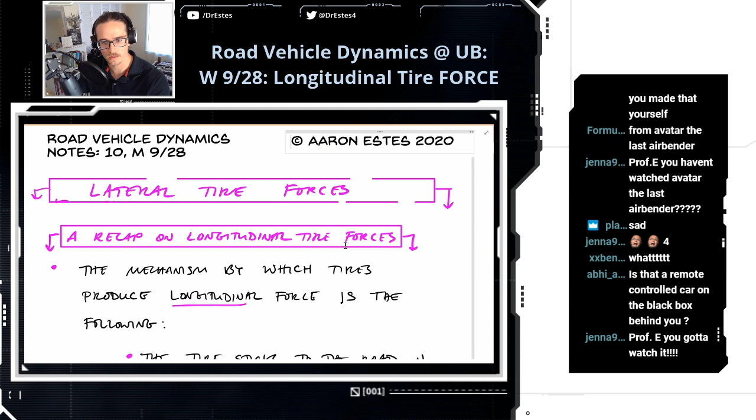Oh wait, we gotta change this title. You know, I enjoy animated shows though. I think I told you I love Full Metal Alchemist Brotherhood.

DD Josh, do you also play the Chinese bamboo flute? No, but somebody mentioned something earlier, like the vertical flute, we call it chow. I don't know if I said that right, but I'd be interested in that. And they make these flutes in all different sizes, this is like a mid-size. I want to get a more bassy flute. I haven't watched too many animes, but Full Metal Alchemist Brotherhood I loved, that's probably my favorite. What else did I watch?

Okay, I've seen Cowboy Bebop, loved that. My Hero Academia. Oh yeah, maybe Samurai Champloo, hands down. Isn't that made by the same people who did Cowboy Bebop? Okay, maybe I need to watch that too.

Oh, I did see some of Attack on Titan. I didn't finish that, I think there's like 2 seasons of that. Oh, you know what I did see? I watched One Punch Man and I loved it. Oh my goodness, I loved One Punch Man. It's laugh out loud funny because it's a parody of all these different animes, and it's just really funny.

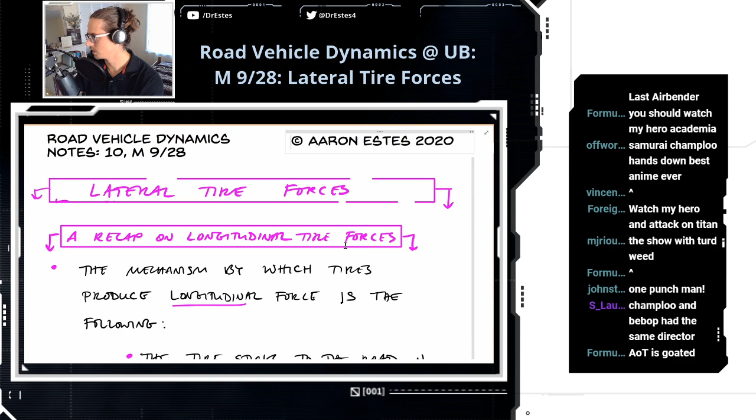Attack on Titan is fire. Yeah, I need to get back into it. I didn't get far enough in for it to really take off.

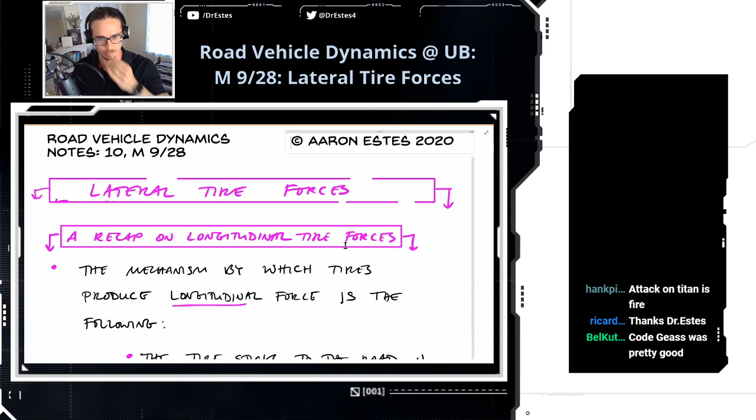All right, today, yeah, it's gonna be pretty sick, he's really cool. So if you're interested in what a job looks like in the automotive industry in some way, he can tell you all about it. He's spoken to the class before, he's really great. So if you want career advice or you're curious about what it's like working with racing teams to design tires, my friend works with him. Well, I know there's a student who took this class last fall, he got a job at Sumitomo. So it's not unheard of for people coming out of the UB program to get into this stuff.

Ooh yeah, Hank, take some vids. All right, everybody, let's talk lateral tire forces, but first I want to review longitudinal tire forces.

Isn't John Robinson also a serial killer from the 2000s? Different John Robinson, or maybe it's the same, he turned his life around. It's all good, we don't talk about that.

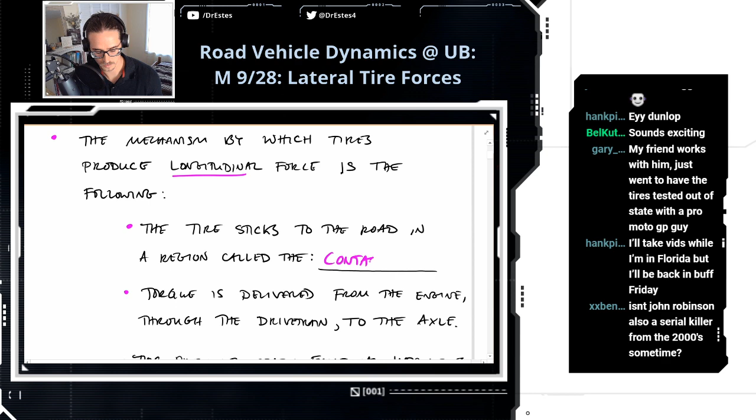Okay, the mechanism by which tires produce longitudinal force - I'm talking about going down a straight - is the following. The tires stick to the road in a region called the contact patch.

Gary, you work there right now? Oh wow, you were just there 15 minutes? Okay. Gary works at Sumitomo, I didn't know that. That's cool.

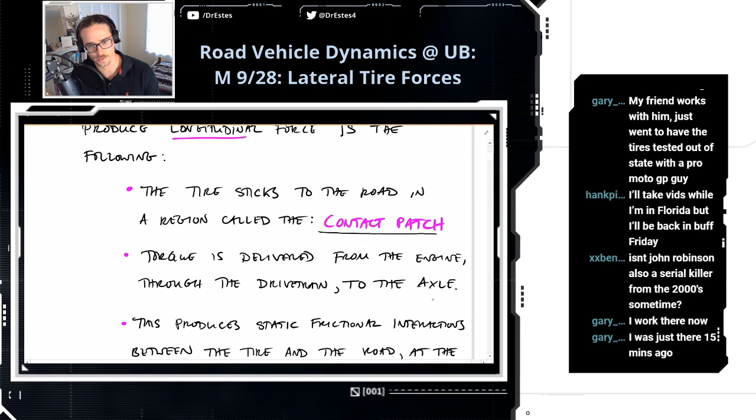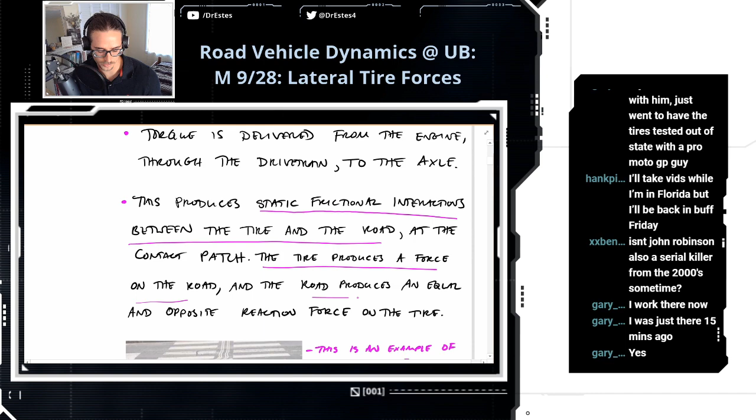Okay, so torque is delivered from the engine and travels through the drivetrain all the way to the axle. Let's say this is a rear-wheel drive car. Once this torque gets to the axle, it produces static frictional interactions between the tire and the road, because the axle's rotating the tire, and the tire is in contact with the road, so there's friction at the contact patch. The tire produces a force on the road, and the road produces an equal and opposite reaction force on the tire. This is a cool figure I want to show you.

So you can see this is like a crosswalk, and it's got some paint on there, and you see it's all deformed here. This is an example of how the force from a tire on the road produces stress, and it deforms the road surface.

So I have a question for you, everybody. Which direction, right or left, are cars traveling on this road to deform the road in this way over time? Are they heading to the right, or are they heading to the left? You're guessing right. Come on, Hank, you got this one. Wait, I think Hank's driving to Florida. Don't drive him off the road.

Cars only go right. Ben, they can go different ways. Let me put on my Sherlock Holmes cap. Yeah, great show, by the way. Well, and films and books.

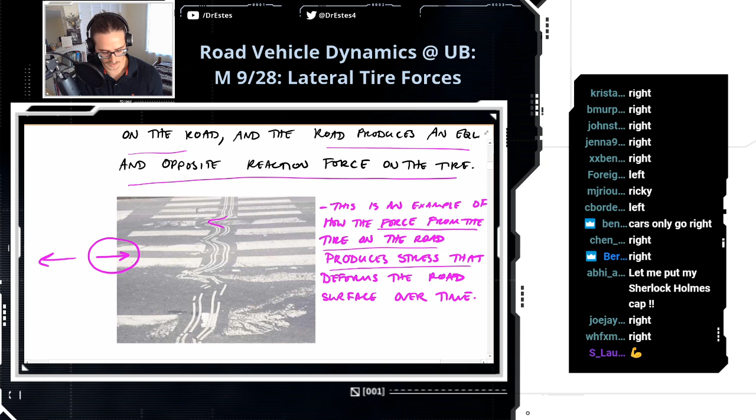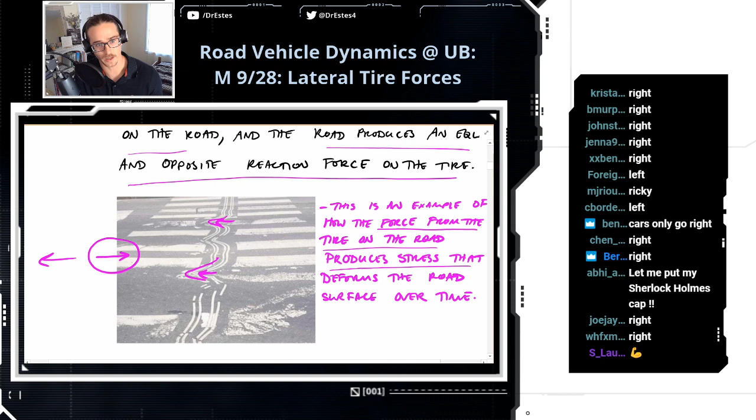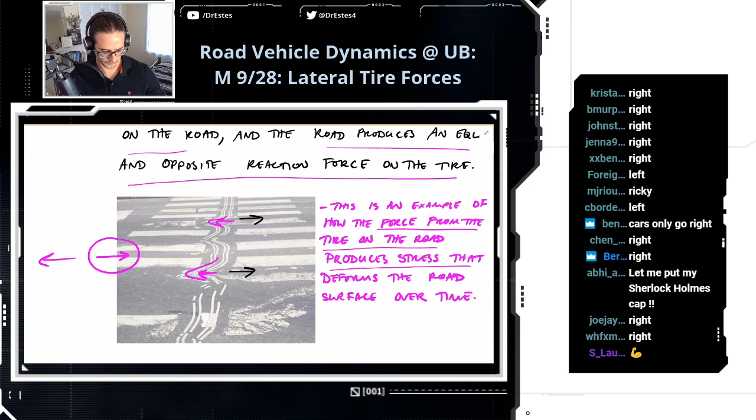Okay, you people who said cars are going this way, you're correct. Because think about this: the road pushes on the car via frictional force, but the tire pushes on the road in return. So where you see these patterns like this is where tires are going through all the time, and they're pushing on the road this way, and the road is in turn pushing on the tire this way and advancing it forward. But just like the tire rubber deforms and then corrects itself like a spring, the road deforms as well over time. I thought this was pretty cool - it's just a demonstration of that equal and opposite force.

So, okay, we're talking about longitudinal force. The combination of the torque at the axle and the reactionary torque from the road surface is going to deform the tire rubber in an elastic way. It's not permanent, so it wants to go back to its original shape.

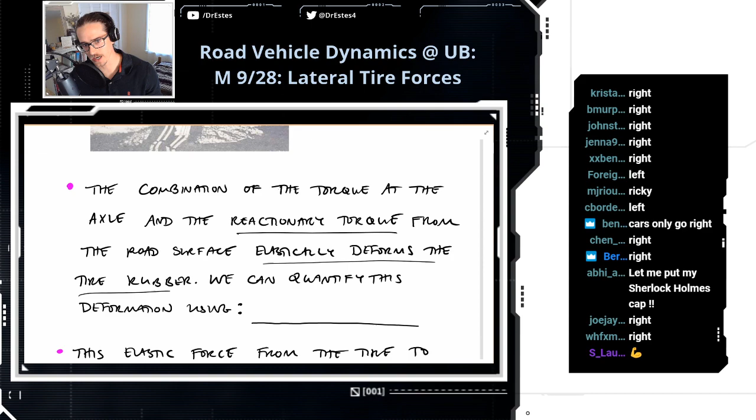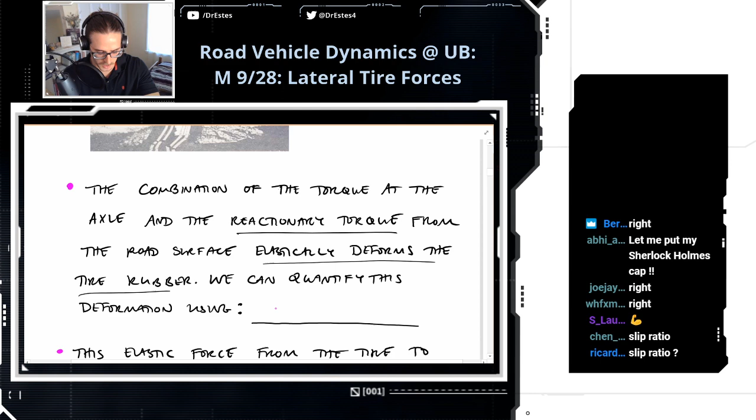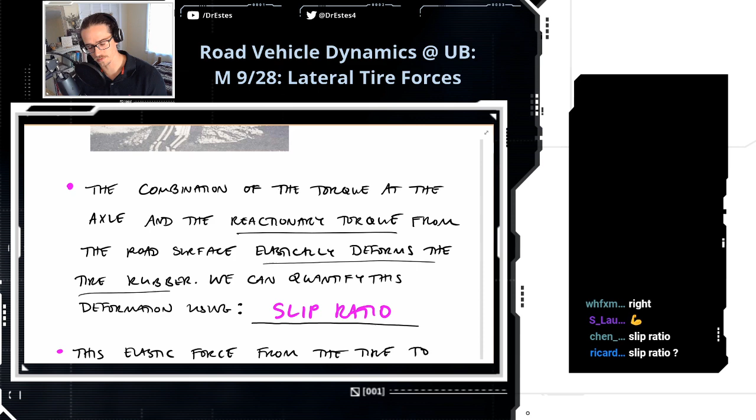We quantify this deformation using what? The chat - I'm asking you, how do we quantify this brush-like deformation in a tire for longitudinal force? Boom, Chen's got it, Ricardo's got it. It's a little bit of an indirect way of measuring the deformation because it's like a ratio of angular velocities. But because the actual angular velocity of the wheel doesn't match what we call the free rolling angular velocity, that means there's some deformation in the tire there. So that's one way to quantify it.

So the elastic force from the tire to the axle pulls the car forward. This slip ratio variable is kappa, by the way. And I don't know if you remember from last time, but force increases as this deformation increases. So as kappa goes up, the longitudinal force the tire produces goes up. Okay, very good.

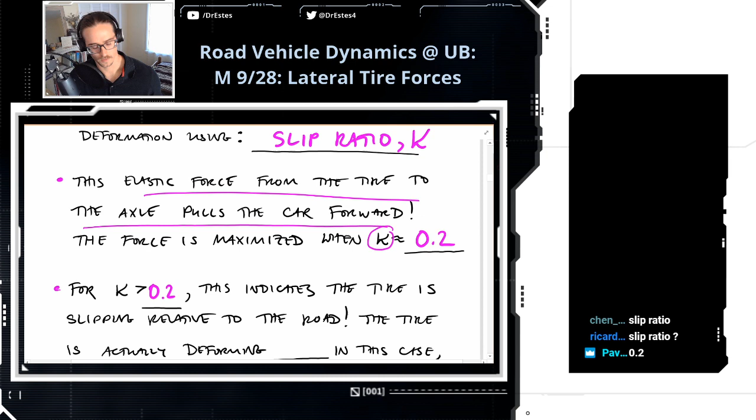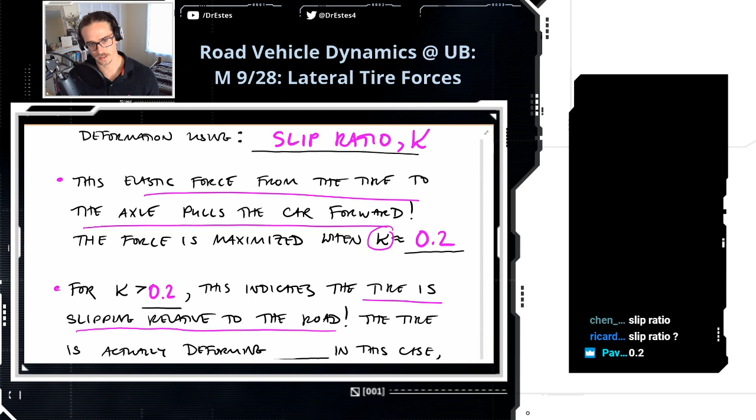Once the slip ratio is around 0.2, the force is maximized. But if the slip ratio becomes larger than 0.2, this means that the tire is starting to slip relative to the road. So if you've put in a little too much gas at a stoplight, you hear your tire spin out a little bit.

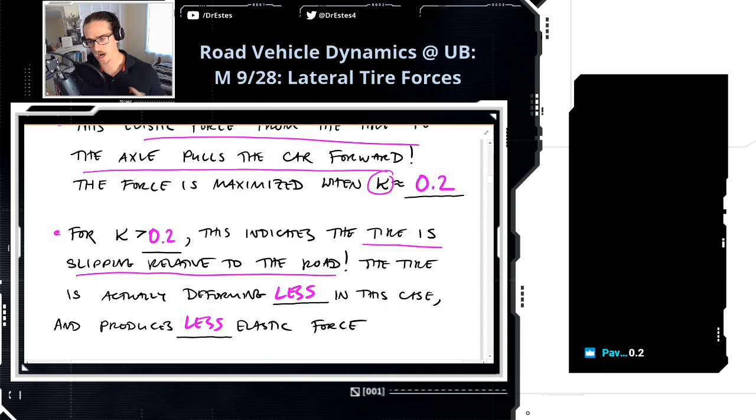When this happens, the tire is actually deforming less because it's not sticking to the road anymore. The fact that it sticks to the road allows the torque from the engine to press the tire into that road, and it deforms it, and that deformation produces force on the car. But when it's sliding, it's not able to deform, and it produces less elastic force. So when you spin your tires out trying to race, you're getting less force.

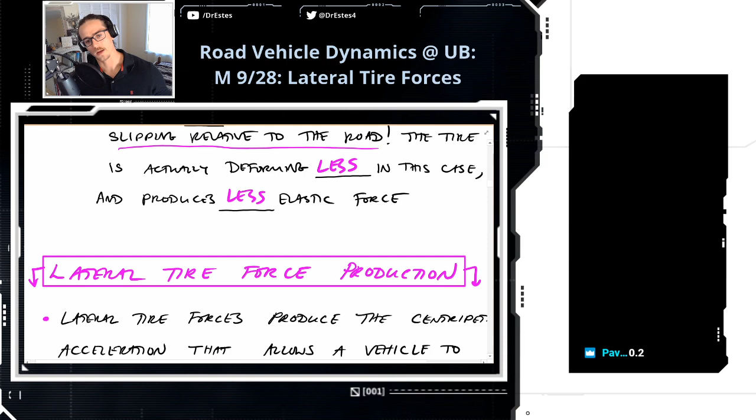So that's kind of the story of longitudinal force. I just wanted to run back through. Lateral force, this is like the side force. It's produced in a similar way.

Lateral tire forces produce the centripetal acceleration that allows a vehicle to corner. When you're cornering, turning left or right, your tires are holding you in that corner. If it's an icy road, maybe you skid out a little bit, and you've noticed when your tires lose traction, you can no longer stay in the corner.

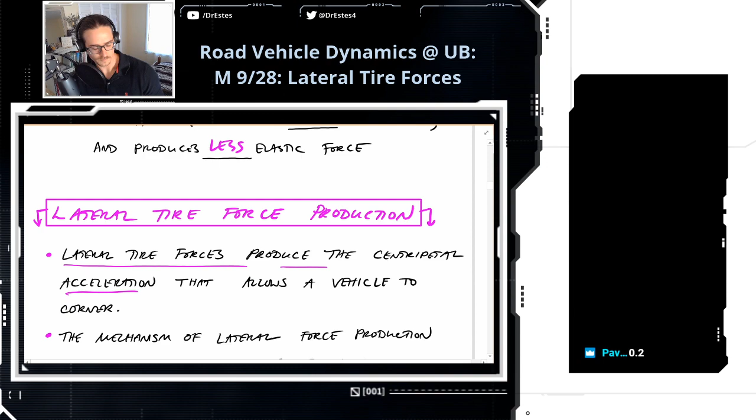This mechanism of lateral force production is similar to the process for longitudinal force production, in that it's the elastic deformation of the tire relative to the contact patch that produces force on the car. When you're turning the steering wheel, your tire is stuck to the road at the contact patch, and you actually deform the tire relative to that contact patch, stretching it like a spring. That's what's going to produce force.

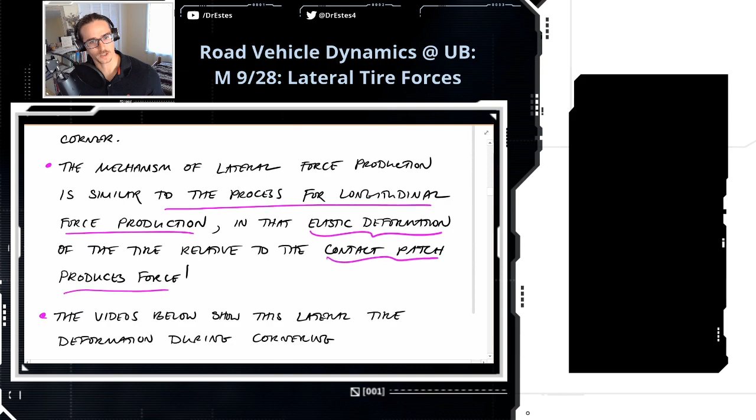Now I want to show you some videos right here. Here we have a camera underneath the car, and these cars are cornering and whatnot, so you get to see how the tire deforms relative to the contact patch. Let's see if I can pull this up.

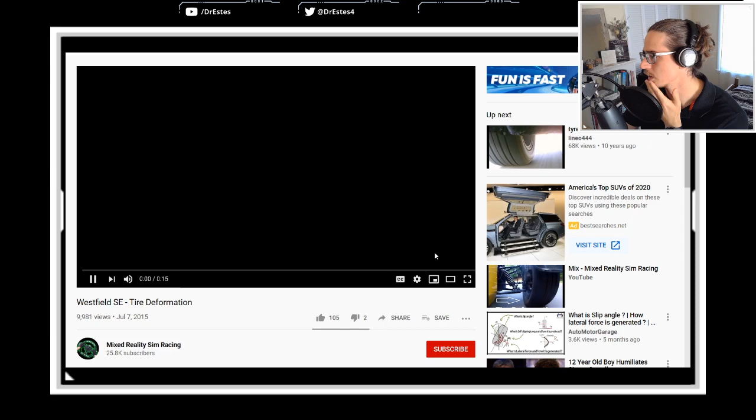So this is the right front tire, and what I want you to do is watch in here, and look at how the tire's deforming relative to that wheel right there. You got the contact patch down here. Try to look at which direction the car is cornering, and look at the deformation pattern as well. So we're cornering to the left, and look, it looks like the tire bubbles out to the left when we corner left.

Because it's on the left side of the tire, it's easier for us to see this deformation while it corners left. Your tire's always deforming. That's producing the force.

Okay, let's watch another one. It may also be happening because of the normal reaction force from the road on the tire. Well, yeah, that'll deform it vertically too, right? We know when we put weight on a tire, it squishes the tire down a little bit. That's why the contact patch sort of flattens out.

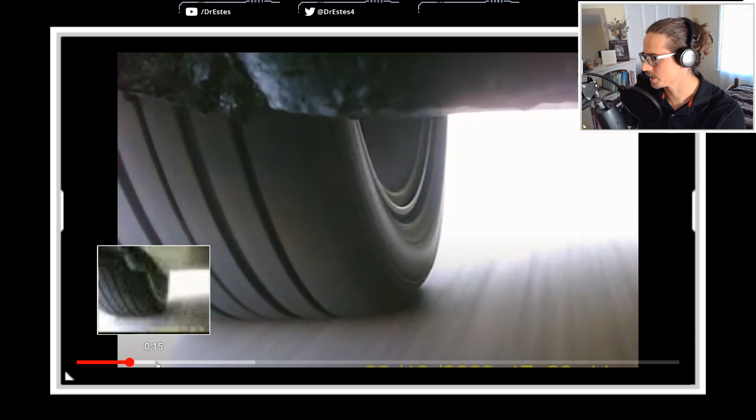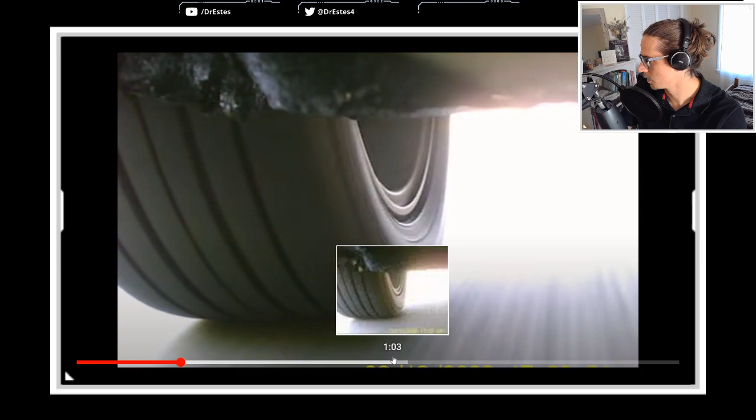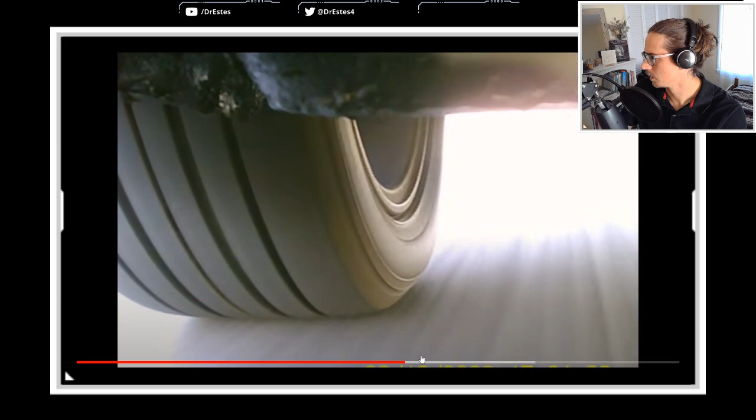Okay, we got another one. This one we can't really see the road so much, so it's harder to... let's try to forward somewhere in the video where this gets a little more extreme. Oh yeah, look at that deformation. It's gonna do it again. It looks like it's cornering to the right.

Okay, so I think you get the idea. Trying to close this thing. Okay.

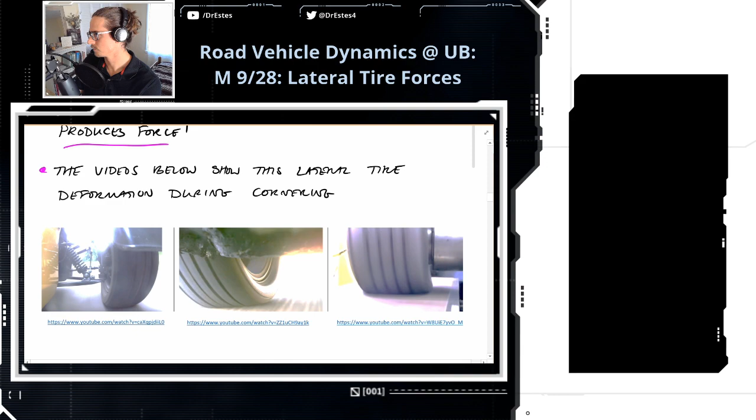All right, so let's break this down a little bit. If only I knew we were doing lateral tire stuff today, I could have tried to get some videos of my tires from last weekend's autocross. Get some of those videos.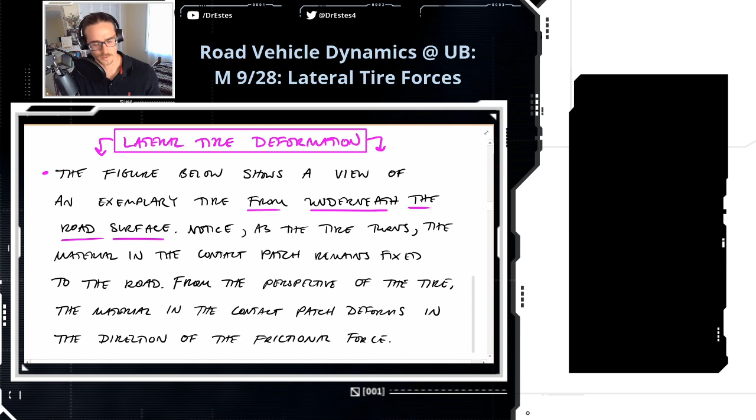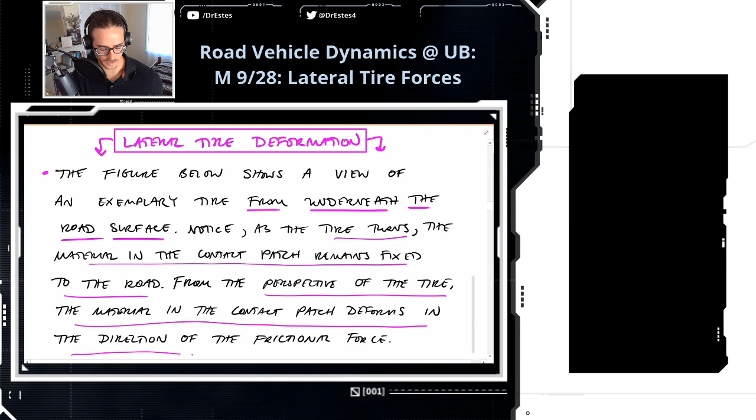All right, so now we're going to look at this in more detail. We're going to look at a view of a tire from underneath the road surface, if you can believe that. We're going to notice as the tire turns, the material in the contact patch remains fixed to the road. And from the perspective of the tire, the material in the contact patch deforms in the direction of the frictional force. So let's break this down.

Okay, so this isn't a real tire. This is some study they did in the 70s. They had this setup where we're looking at a tire from underneath, and it must have like a plexiglass thing with the camera down here. The tire is rolling here to the left, this is our direction of travel. And this kind of light region is the contact patch, where this soft tire for the experiment is pressed into the plexiglass.

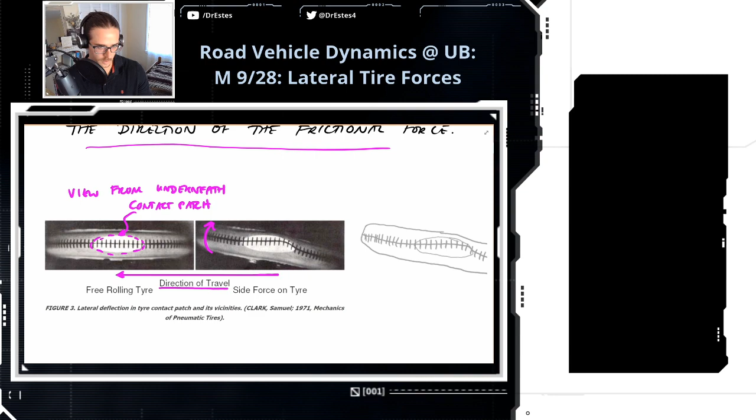And then what we do is we turn the tire to the right. Or wait, if I'm looking from underneath, that's a left. Doesn't matter, we turn the tire. The deformation occurs towards the direction of the frictional force. Yes, well, yes.

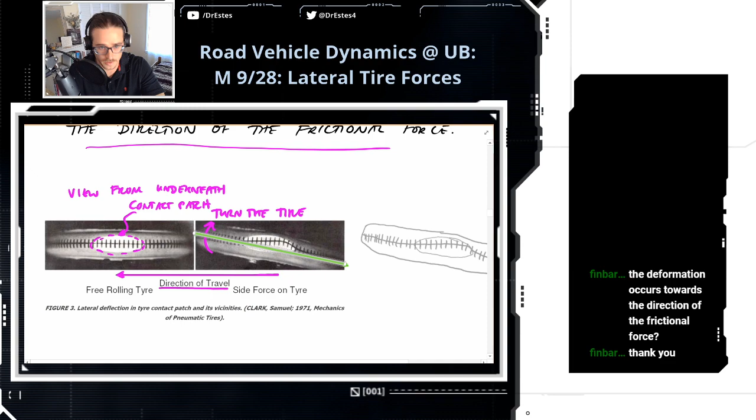Well, let's break it down. So what I'm going to define here is the longitudinal wheel plane. This'll help you see. So if I take the center line of the tire at one end of the tire and connect it to the other end, this creates what we call the longitudinal tire plane.

So we turned the tire plane when we steer that wheel. Look at this though. Remember, the direction of travel is always just straight this way. So maybe I'll draw this again. This is the velocity vector of the tire. It's still heading that way, just straight to the left.

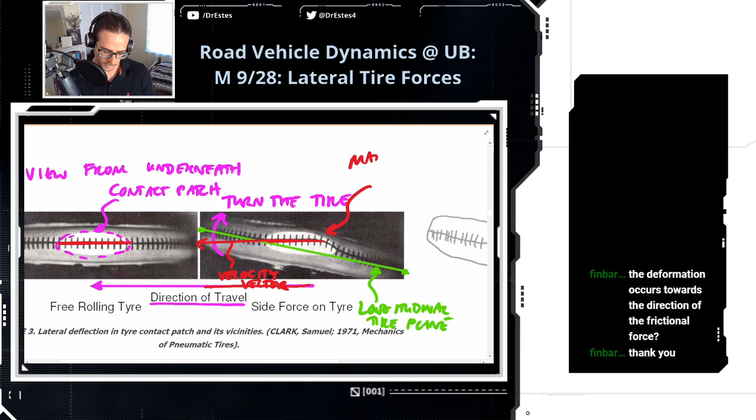And this fiber in the contact patch, it hasn't changed since turning the tire. So let's say that material in the contact patch is aligned with the direction of travel.

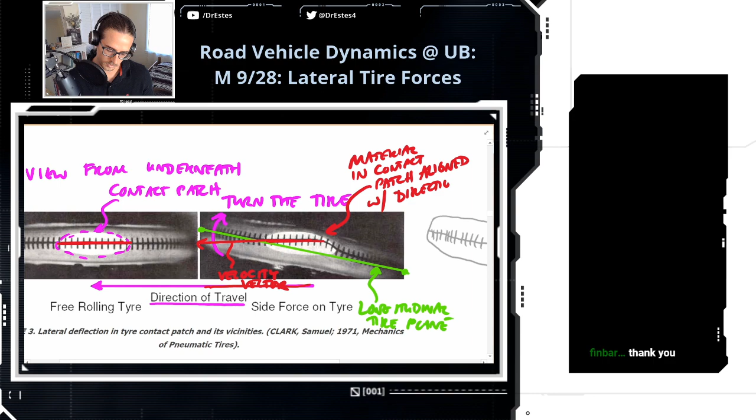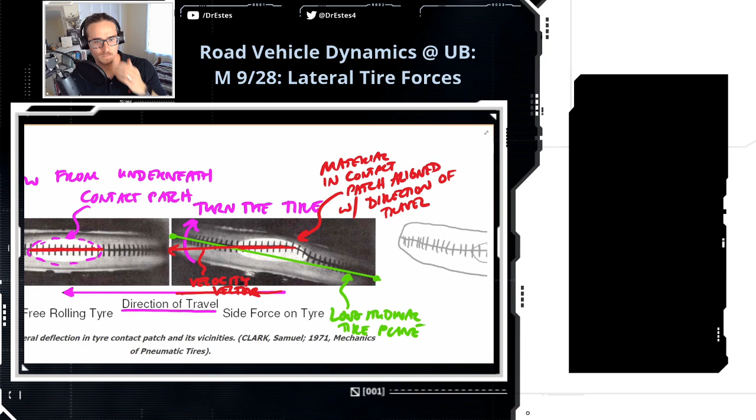And it's still stuck to the road. I'm going to try to break it down a little bit more over here, so I think it'll be easier to see.

So I have the longitudinal wheel plane, and then in the contact patch, relative to this wheel plane, this is the deformation that I'm talking about. It's like from the perspective of the tire, looking down at the contact patch, it's going to be like, hey, my center line in the contact patch is deflected. And that's kind of like in those videos we saw, you saw this kind of bubble on the side of the tire.

And the tire is deforming and bubbling out in the direction that you're cornering. Let's draw this velocity vector again. So when you're cornering, there's always going to be some misalignment between where the tire is pointed, the longitudinal tire plane, that green line, and the actual direction that it's heading.

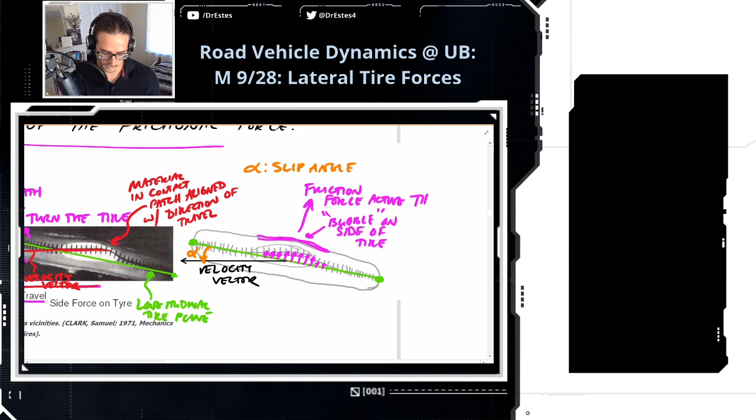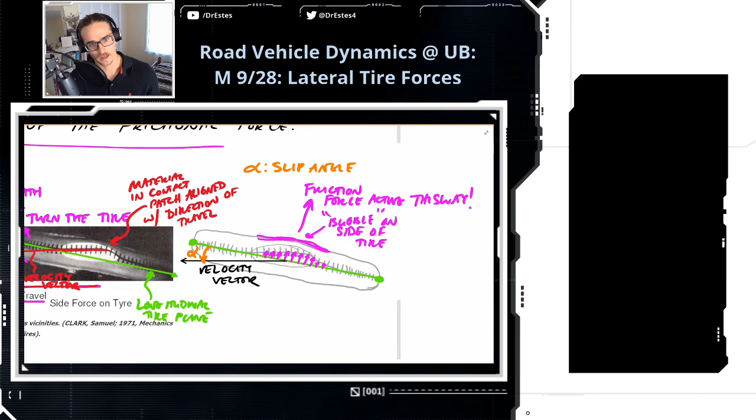Once again, in the contact patch we have this deformation that's bubbling in the direction of cornering, and so the friction force is acting this way on the tire, in that direction where the tire is deforming. And that ultimately means that the lateral force on the car is also acting that way, and it's going to have it corner in that direction.

So maybe we'll just do that. Lateral force, like the side force on the car, is in this direction. So we're cornering that way.

This is one of those things you have to do some thought experiments with. It takes some time to wrestle with, to figure out what's going on with the tires. But I think the way that we did it, watching some videos of the tire from underneath and seeing which way the car is going, that helps reinforce this. Okay, so let's break this down a little bit.

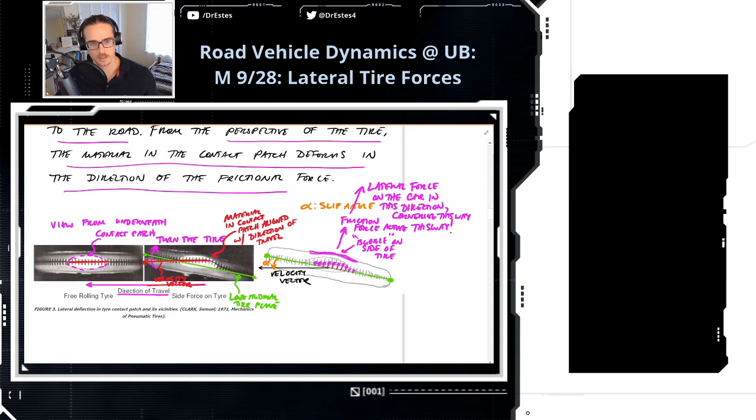So in the contact patch, let's talk about what's going on in there. The tire treads, for one, they're stuck to the road. There's this static friction there. And these tire treads are also aligned with the direction of travel.

In other words, they're aligned with the velocity vector of the tire. Oh, I don't know what I did with this tire here. Okay.

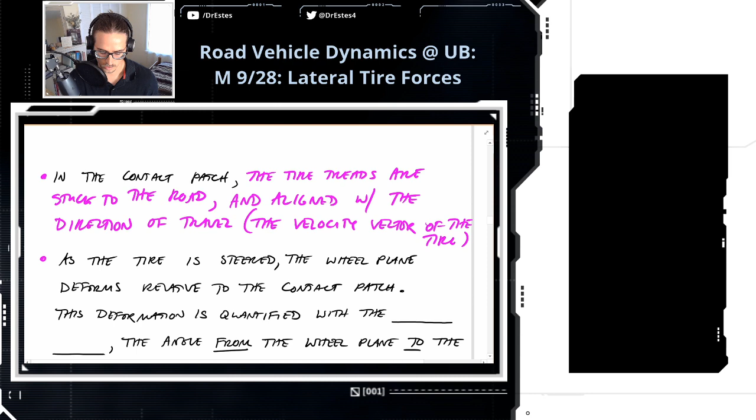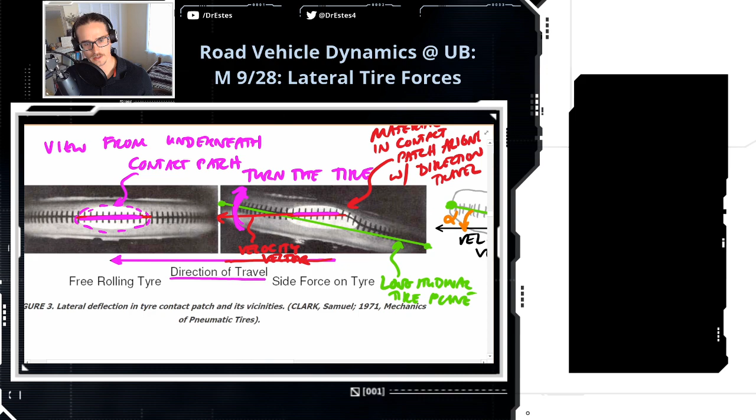So as you steer the tire, the wheel plane is deforming relative to this contact patch. So here we've got the contact patch, it's all aligned with the direction of travel. And then I rotate the tire, and that deforms the tire relative to that contact patch. That contact patch remains stuck to the road.

So the wheel plane deforms relative to the contact patch, and this deformation is quantified with the, not the slip ratio, but the slip angle, and we call it alpha. And this is the angle from the wheel plane to the velocity vector.

And if you want to know, is this a positive or negative slip angle? It is defined positive counterclockwise about the z-axis of the tire. And below we're going to get into what is the z-axis. But according to SAE, the Society of Automotive Engineers convention, the z-axis for a tire is pointing down into the ground.

Okay, so you're stretching this tire laterally, and the tire, because it's like a spring, it wants to regain its original shape. So in my mind, this is the way I think of it: the tire pulls the car toward the contact patch. Like in those videos, it looked like the contact patch was bubbling towards the direction that you're cornering. Well, really, the contact patch is stuck to the road, and it's the car that is kind of veering toward the contact patch.

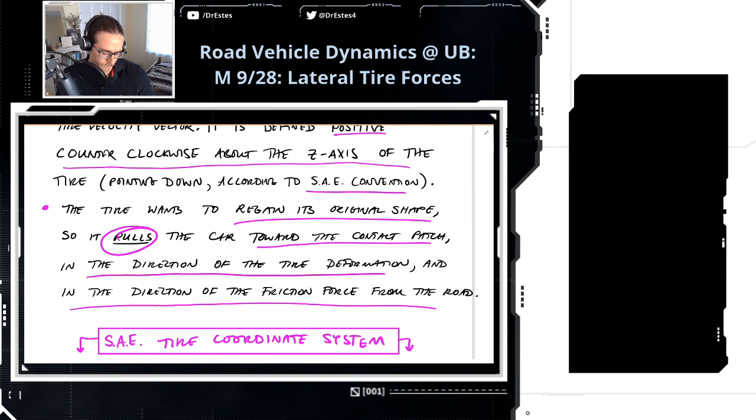So drive safe, everybody, as we're going into the fall here. Oh, I don't even want to think about winter. Don't get me started on that.

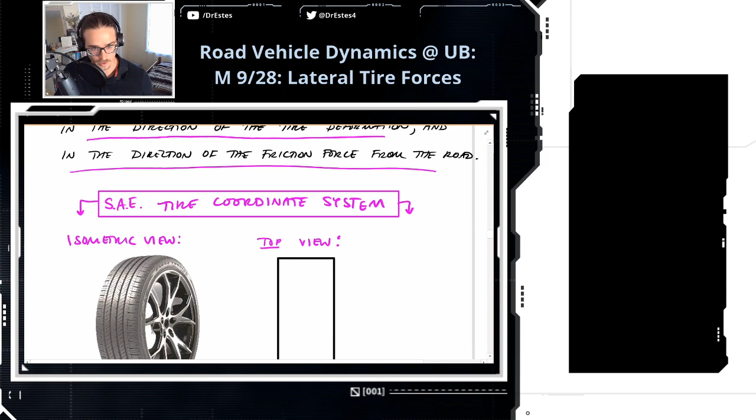All right, let's talk about the SAE tire coordinate system.

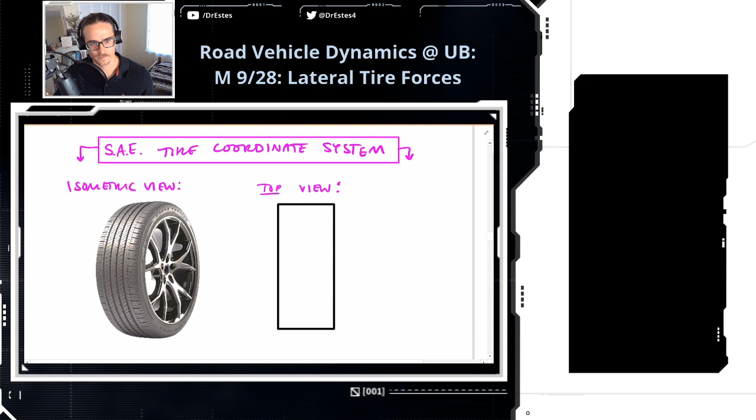Speed up around turns. No, MJ, that's not what I said.

Driving in winter makes me cry. Yeah, I know, it makes a lot of us cry.

The origin of the coordinate system is at the very bottom of the tire, at the contact patch. It's not at the center of the tire, like up here at the wheel hub or something. It's at the contact patch. And the Z direction is defined positive, down.

So the origin of the coordinate system is at the center of the tire contact patch. To get more detailed, it's at the center of the tire contact patch when the car is stationary, because as the car corners, the contact patch deforms, and the origin is not going to change as this contact patch deforms. We always imagine it's at the center of the contact patch when the car was just sitting still on the pavement. All right, so that's the Z direction. The X direction is next.

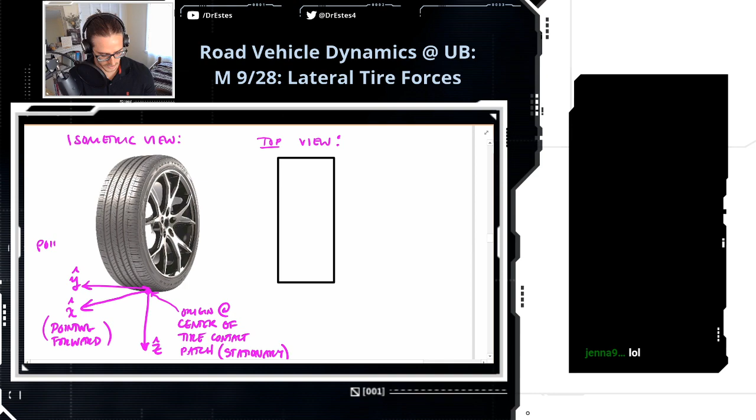Right along the wheel plane. You'll get to see that better in the top view. And then here we got our third axis, the Y direction. This is interesting, it's defined as always pointing to the driver's right-hand side.

Gary says, of course, it would be cool to drift. Okay, of course Gary's bringing up drift. It would be cool to look at the drift car alignments because they are aligned to have the largest contact patch at full steering lock.

Yeah, that'll be interesting because I want to talk about side slip. Winter is great because easy front-wheel drive drifting. You guys and your drifting, it is fun.

Okay, so the Y direction is pointing to the driver's right. So you're sitting in the driver's seat, point your right hand out the window. That's the Y-axis for a tire as well.

So let's look at this from the top view. The origin is right at the center of the tire contact patch when the car is stationary. X is pointing forward along the wheel plane. Oh, front wheel drive, my bad. You're right.

Okay, and then if this is going forward, then that means the driver's right-hand side is going out that way, if we're looking at the tire from the top. And then the Z is going down, so we're going to draw this vector going straight down.

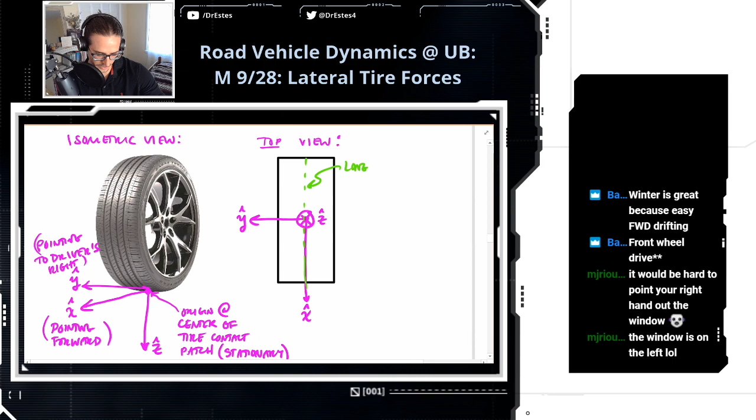The window is on the left. Okay, good point. Use like a golf club or something as an extension of your right arm. Be careful of the passenger. Longitudinal wheel plane, okay, you're right. You have this freakishly long arm that just extends out. That's funny.

Okay, so this is the SAE tire convention. This is just the introduction, we're going to keep working with this, and you'll get used to it. It'll become natural to you.

All right, we're going to talk about something cool: the pneumatic trail and the self-aligning moment.

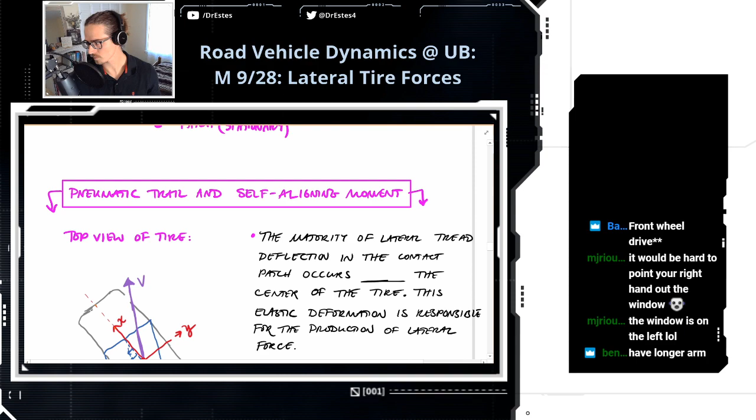So let's look at this top view of a tire. Let's break this down. Here I have the velocity vector of the tire in purple, and notice it's not aligned with the longitudinal wheel plane.

So the wheel plane is aligned with X. Is this the top view? Yes, it is. We're looking at this from the top, Benny.

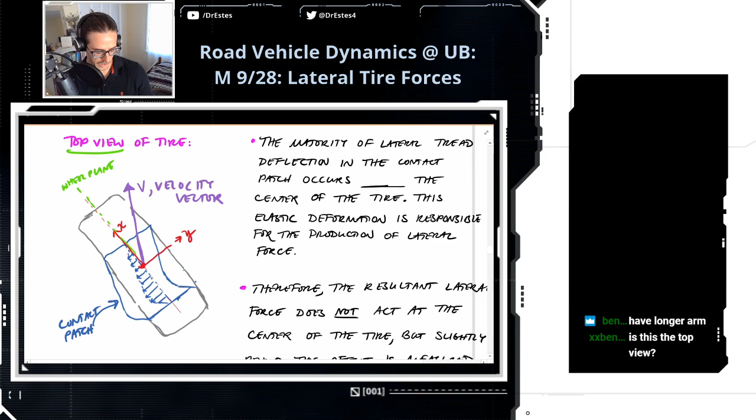Now here in blue, this is the contact patch. So I'm looking at this down from the top, and you're seeing from your top view, like the bottom of the tire is bubbling out this direction.

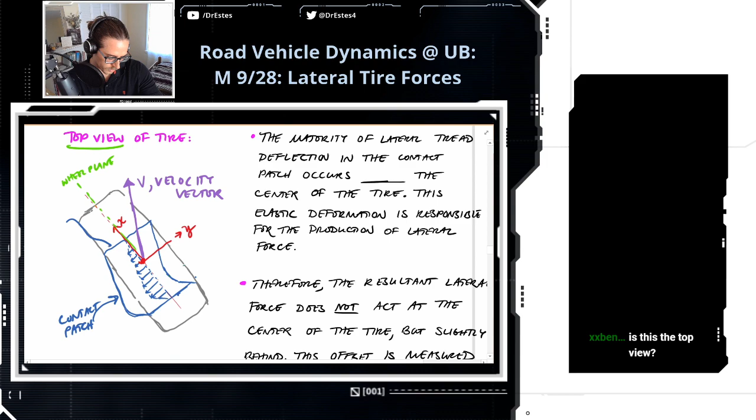So which way is this tire cornering? This is the front of the contact patch. Back here, rear of contact patch. This is turning right.

Wait. Yeah, I think we're turning left. We're turning left, because even though the velocity vector is to the right of the wheel plane, I see why this might be confusing. The velocity vector is to the right of the wheel plane right now, but I'm turning the tire to the left.

And remember, the contact patch is stuck to the road, and so I've turned the wheel plane this way to deform it relative to that contact patch. It's trippy to think about, but always start from the contact patch. It is stuck to the road, and when we turn the steering wheel, we deform the tire relative to that contact patch. So in the contact patch, the center line is deformed according to this kind of pattern.

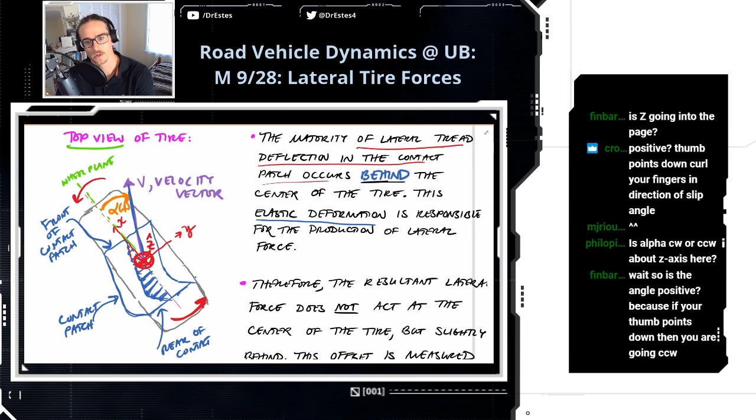Is alpha clockwise or counterclockwise about the z-axis here? This is counterclockwise about the positive z-axis. Is the angle positive? Yeah, the angle's positive, because if you point your thumb down into the page and curl your fingers counterclockwise, it's positive.

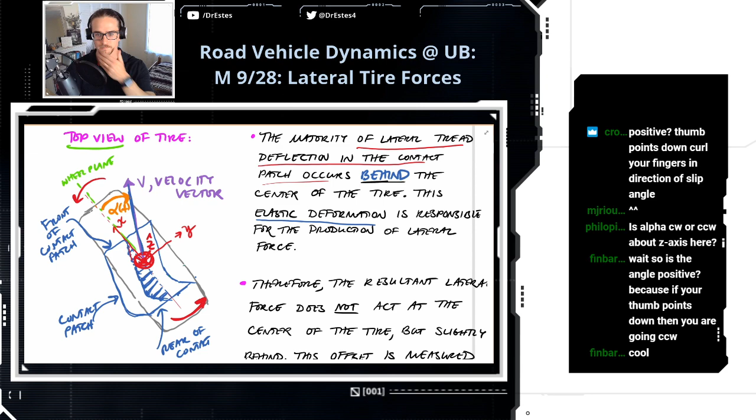Okay, so this deformation produces lateral force. The resultant lateral force from this deformation does not act at the center of the tire because most of the deformation is behind. So let's try to draw a representative lateral force here.

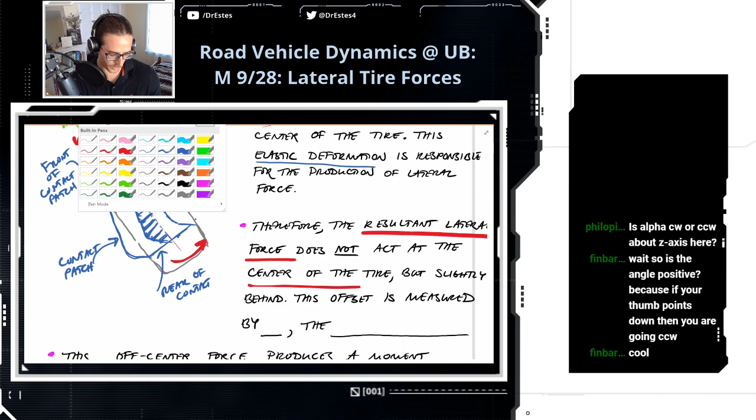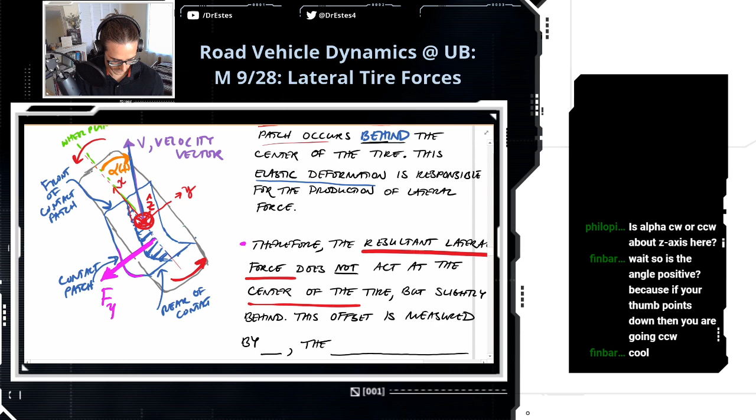So we know the friction force is acting in the direction of this deformation here. You're going to be cornering in the direction of this bubble that's on the bottom of the tire. So the lateral force is going this way. I'll call this F, we'll call this Fy. And I'm drawing it behind the center of the tire because the deformation is mostly behind the center of the tire.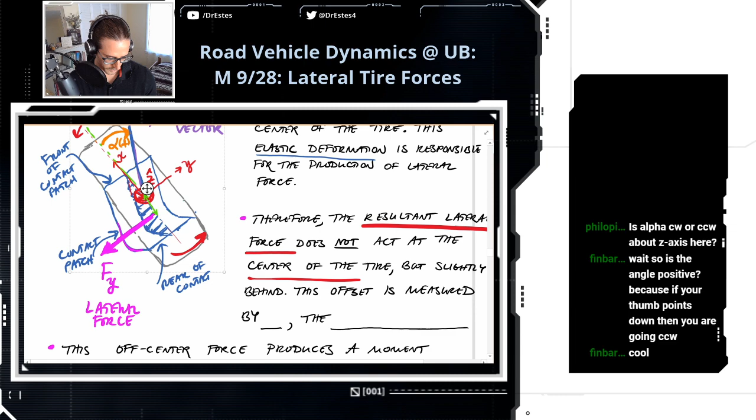So here we have an offset, and I'm going to draw this on here, in green. I have this distance between the center of the tire and where the resultant lateral force is, and we're going to call that distance E. This is called the pneumatic trail. It has a really fancy name for a lever arm. It's really privileged in that way. It's called the pneumatic trail, that distance.

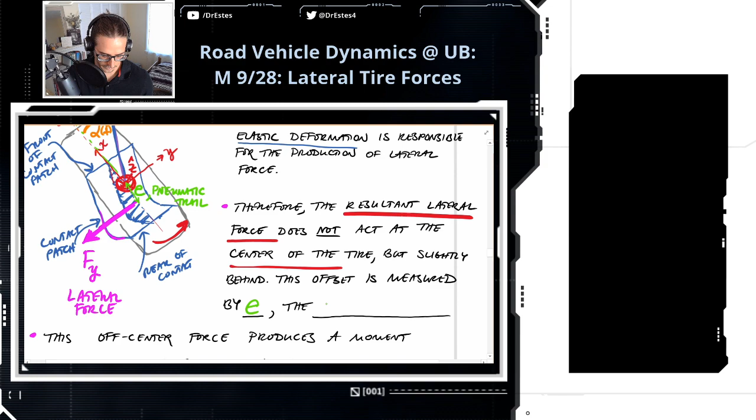Okay, so this offset is measured by E, the pneumatic trail. And we know that when a force is offset from some point by a distance, it produces a moment. So anytime you have lateral force on a tire when you're cornering, because of the way the tire deforms, you're also producing a moment on the tire. You're producing a torque. Now, this off-center force produces a moment or a torque about the tire center, and this is called the self-aligning moment.

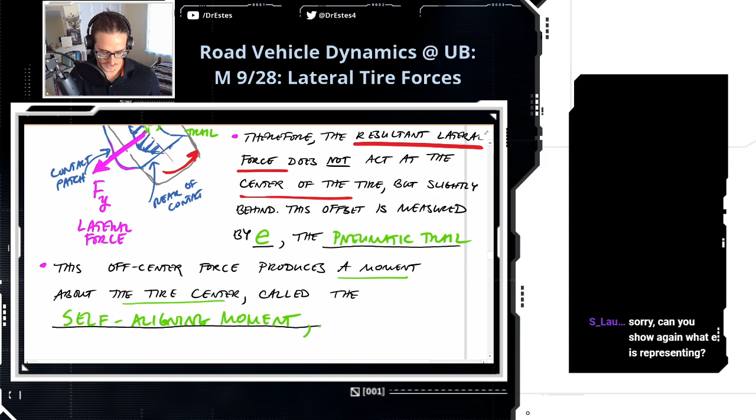This is the last thing we'll talk about today because we're running out of time, but this is something you might have experienced as you drive. Let's call this self-aligning moment MZ because it's a moment about the Z-axis.

Sorry, can you show again what E is representing? Sure.

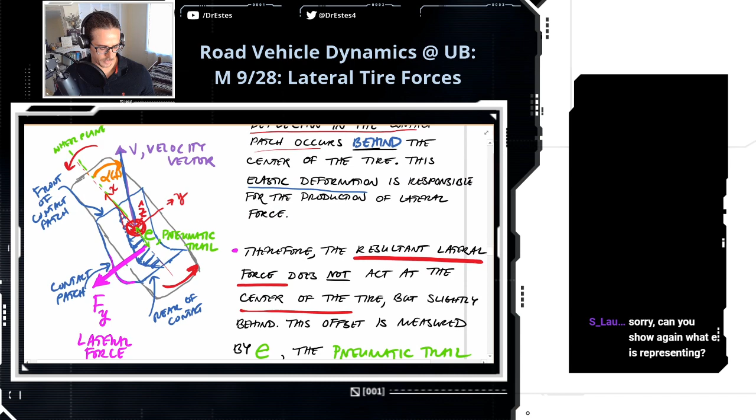So what E is, we have the center of the tire here, like at that Z vector pointing down. So that's the tire center. And then we have the resultant lateral force back here, Fy, pointing off to the side. It's in the direction of this bubble of deformation. So the pneumatic trail E is this offset, that perpendicular distance between that lateral force vector and the center of the tire. That's the pneumatic trail.

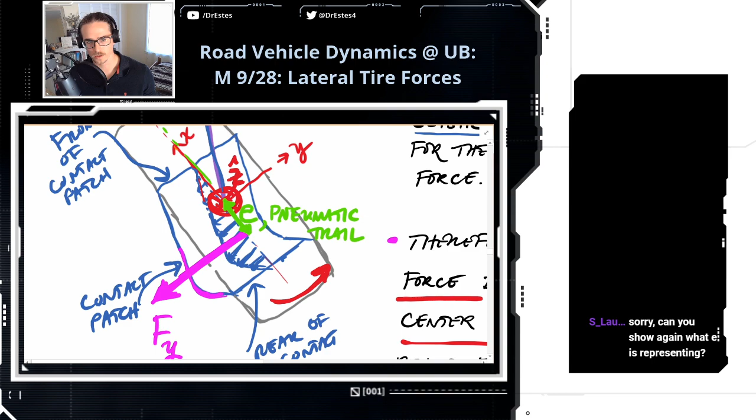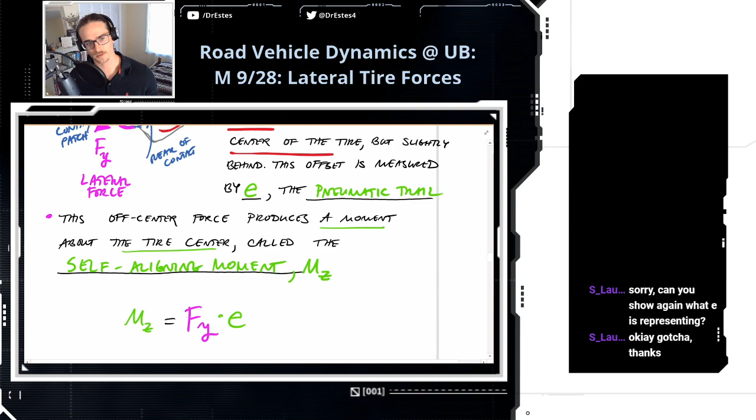And then the moment, Mz, that's going to be this lateral force times the moment arm, because that's the definition of a moment: the force multiplied over the perpendicular distance from wherever you're taking the moment.

Okay, think about what this moment tends to do, looking at this picture. All right, this is the last thing we're doing. We're thinking about what this moment actually does to a tire. You might have experienced this while you drive.

Okay, this is a little hard to think about, but looking at this picture, we have this contact patch, it's bubbling to the left. We're looking at this from the top, okay? So this situation is, think of this maybe as your front right tire or something. I'm steering to the left, and the tire's deforming to the left, and this moment acting over that distance, what that wants to do, it actually wants to turn the tire back to the right. Because think about this moment, it kind of wants to act that way, right?

This is why we call it the self-aligning moment. Because anytime you steer to the left or something, the self-aligning moment is actually fighting you to push the tire back to the right. Or if you turn to the right, the deformation would be on the other side, but it'd still be behind center. So if you're turning right, this would want to turn your tire back to the left.

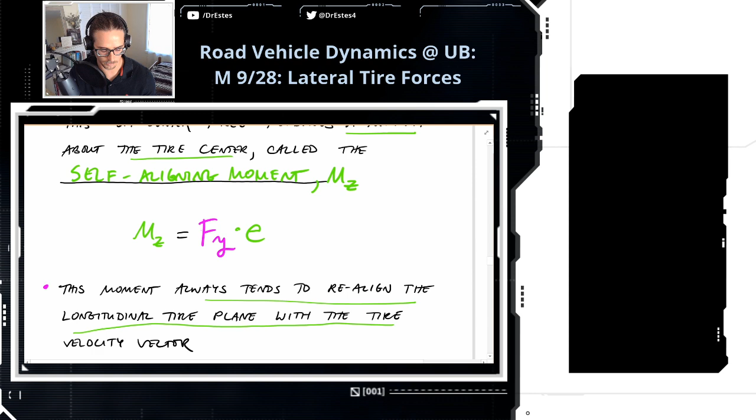You can do a little experiment. Do it in a safe place, but let's see if I put it down here. Okay, so we call it the self-aligning moment because this moment always tends to realign the longitudinal tire plane with the tire velocity vector.

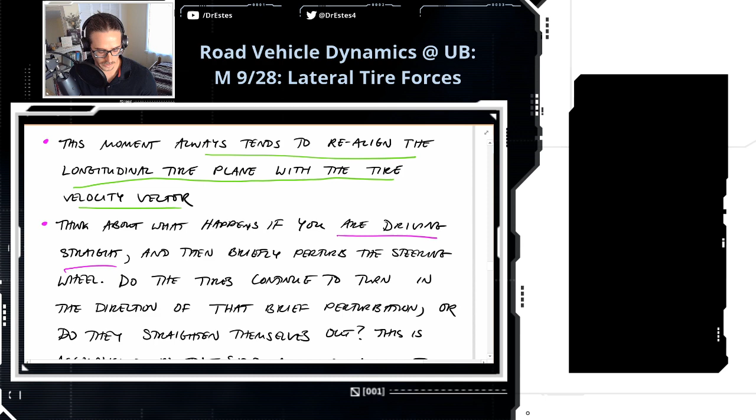Okay, so here's the experiment. You might want to try this, but don't get into an accident. Let's say you're driving straight, and then you briefly perturb the steering wheel. So what I mean is maybe you just gently nudge it to the right a little bit, or maybe gently nudge it to the left. Think about what happens when you do that. Like you tap the steering wheel to one side or the other and you gently steer. Do the tires just continue to keep turning in the direction of that little perturbation and kind of push you off the road? Or do they straighten themselves out?

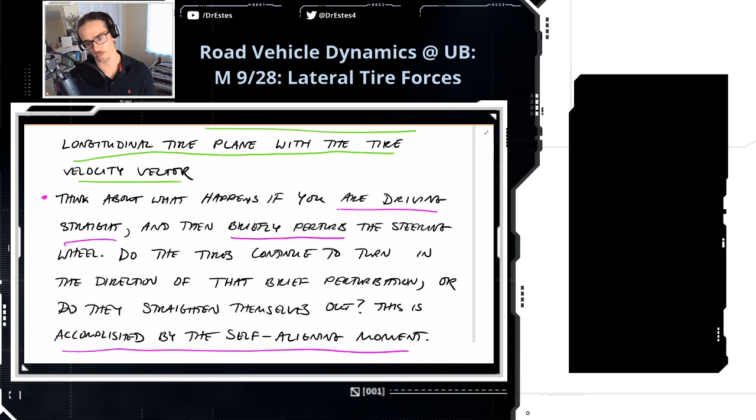You probably know what happens, but I'm not going to give it away. Whatever does happen, it's accomplished by this self-aligning moment. You turn the tire, that's going to deform the tire a little bit. Most of that deformation is behind the tire center.

That produces a moment which tends to realign the tire. It's kind of like a coincidental safety thing built into the physics of tires that I don't know if it was intentional or not. Probably. Well, I mean, it just is what it is.

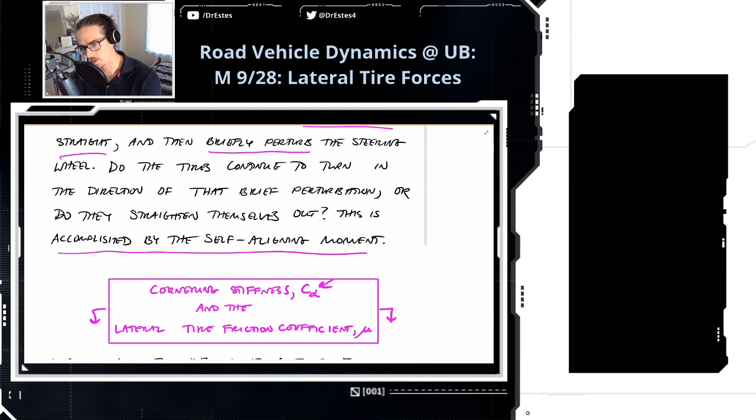All right, we're running a little bit over. So next time we're going to get into probably the most important thing when you're talking about the cornering performance of a tire. It's going to be the cornering stiffness and the friction coefficient. And we're going to get to that on Wednesday.

Results may vary if your alignment is off or if tires have worn unevenly. Yeah, that makes sense. So we'll talk more about that on Wednesday, but remember, the plan is Friday, I'm going to send you guys a Zoom link.

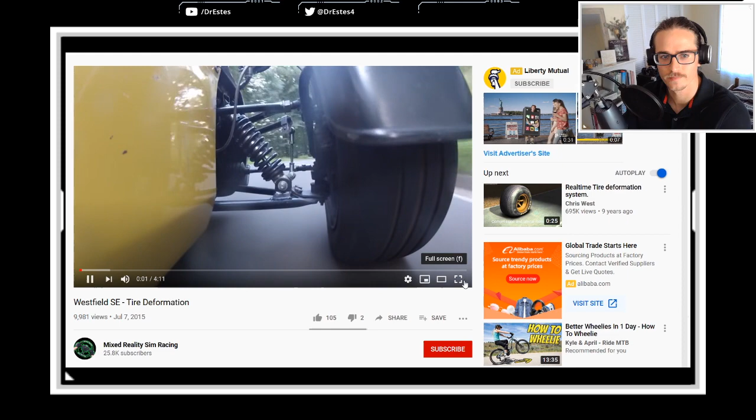Ta-da! Are you kidding me? Liberty Mutual customizes your car insurance, so you only pay for what you need.